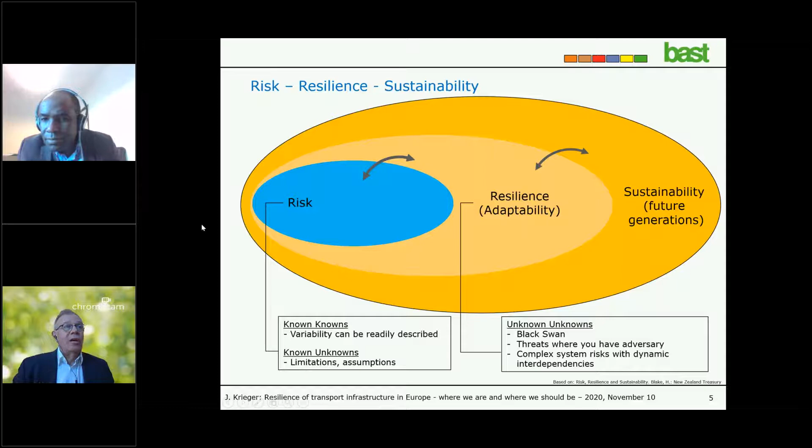So this is more or less the position of resilience within sustainability. I wanted to show. So what is resilience then?

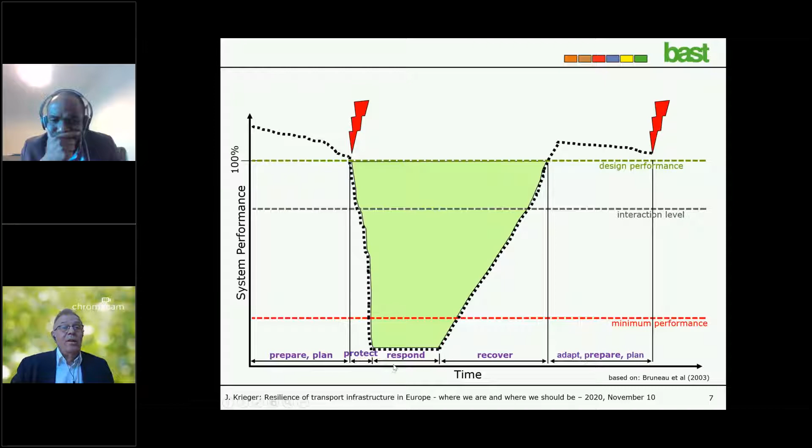So very often you see something like this, the system performance over time. You have an incident at a certain time shown here. And what is resilience? Resilience starts well before the event. You can prepare, you can plan, you can protect your structures or your assets, respond, recover, adapt, prepare, plan. This is why you very often see something like a resilience cycle.

So all of this is resilience, all these elements are elements of resilience. For quantification, very often you use these areas to quantify resilience, but I would not like to go into detail here.

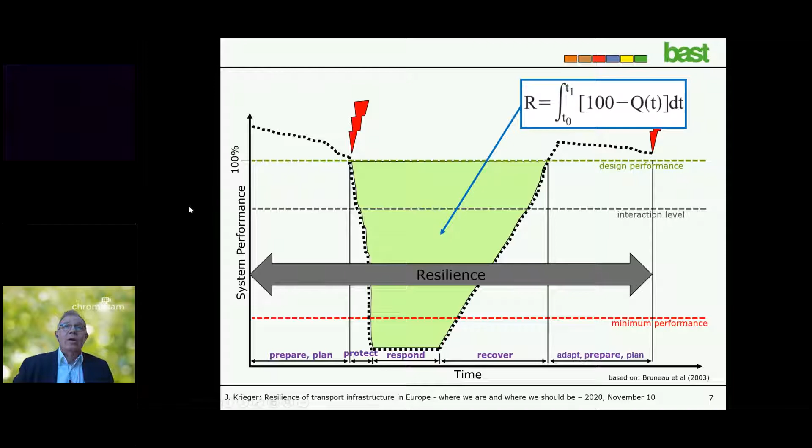Already mentioned before, what are the threats, what could be the events? This could be, first of all, natural hazards: earthquakes, landslides, storms, tsunamis. But also other hazards, man-made events, terrorist attacks, cyber attacks, more and more important I think also for our infrastructure as we move to smart roads and smart infrastructure. So it's important to know that resilience is, or should be, an all-hazard approach, not for one specific hazard.

So where we are with this topic of resilience: Adebola already mentioned that I have a function in PIARC, World Road Association. This is the strategic plan, and you can download this plan on the PIARC website. Resilience of road infrastructure is one of the cross-cutting issues within this strategic plan of PIARC for this cycle.

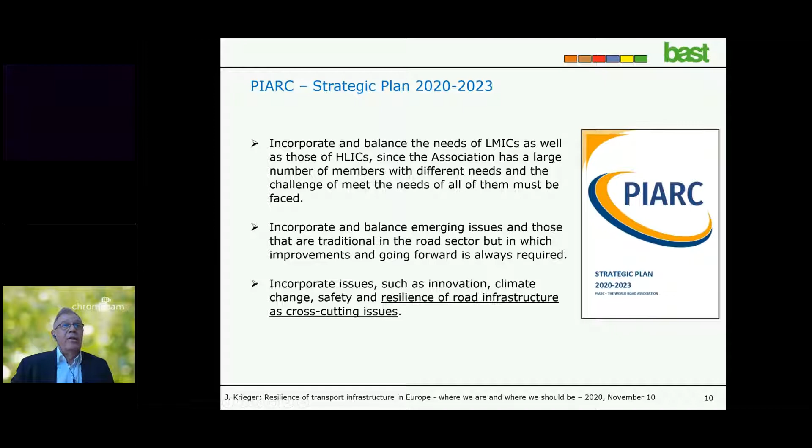So these are the technical committees. You know that PIARC is not a research organization, PIARC works more on case studies, on good practices, best practices. We have one strategic theme called Resilient Infrastructure, with pavements, bridges, earthworks, tunnels. And we have TC 1.4, Resilience of Road Networks. And of course we have a TC on asset management. All these technical committees have topics about resilience within their terms of reference for this cycle.

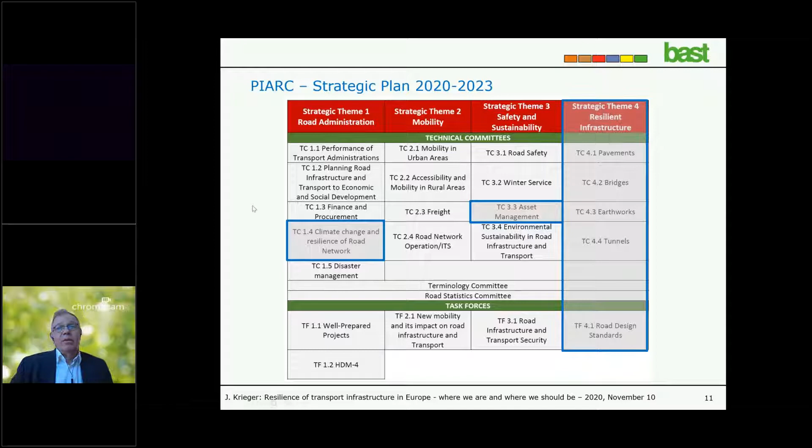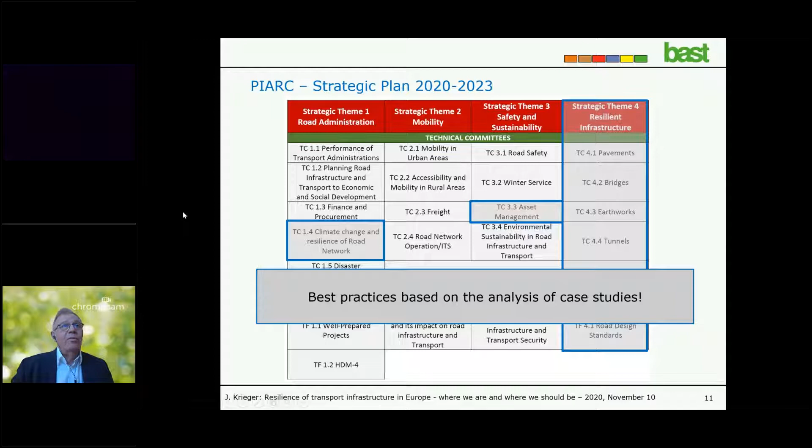So again, PIARC is not research. Therefore it's more where we are. PIARC collects best practices based on the analysis of case studies. So this is what PIARC does and what PIARC will do.

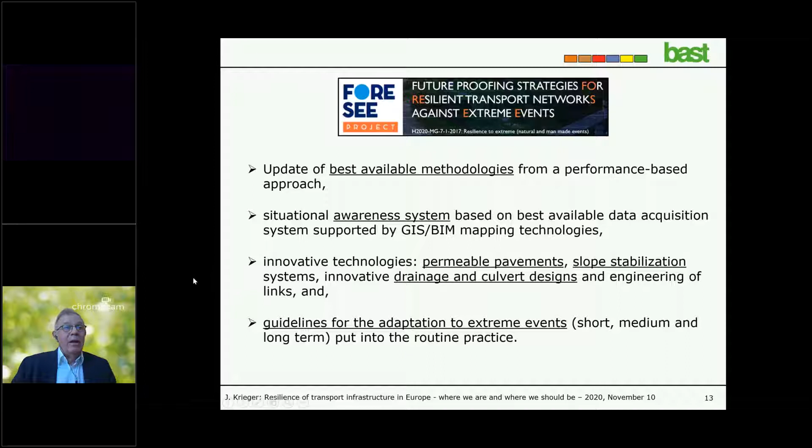A little bit different, of course, like mentioned, the project FORESEE. I have just copied and pasted something from the internet sites of these projects. FORESEE looks at methodologies, awareness, but also specific measures for specific elements of our infrastructure. What I love to see here, we will probably have guidelines at the end of the project, which makes the implementation much more simple.

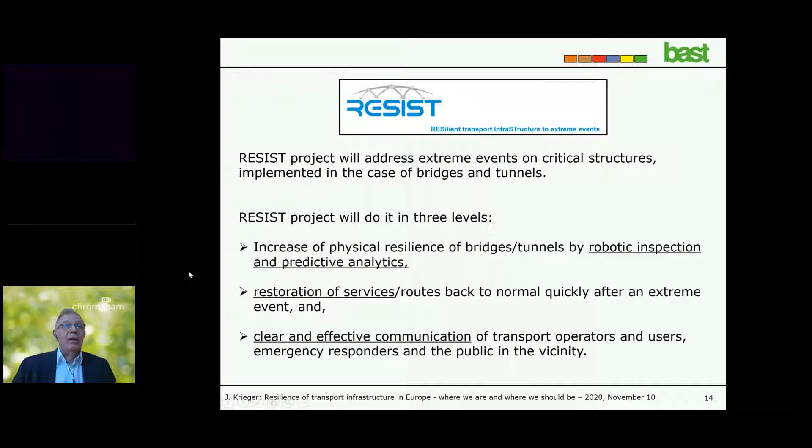So RESIST: robotic inspection, predictive analytics, restoration. This is more about coming back to normal operation, and communication, which is absolutely necessary in emergency situations.

SAFEWAY works on 3 elements here: preparation, response and recovery, and mitigation. So more or less most of the elements of resilience. And Panoptis looks at climate change scenarios and aims at developing integrated tools, which is important.

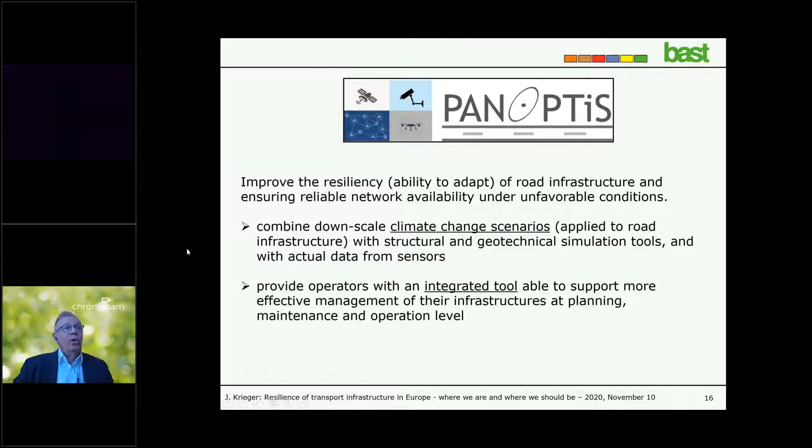So I think we can somehow answer this question. Looking at PIARC, we will collect good practices and analyze case studies, good examples. So this is important. We will see how owners and operators work with resilience. And of course, from these 4 projects, I expect a significant step forward. This needs, like already mentioned, the project results need implementation.

So this was the first part of my presentation. The other question: where should we be? And in my opinion, where should we go with resilience? This is also important.

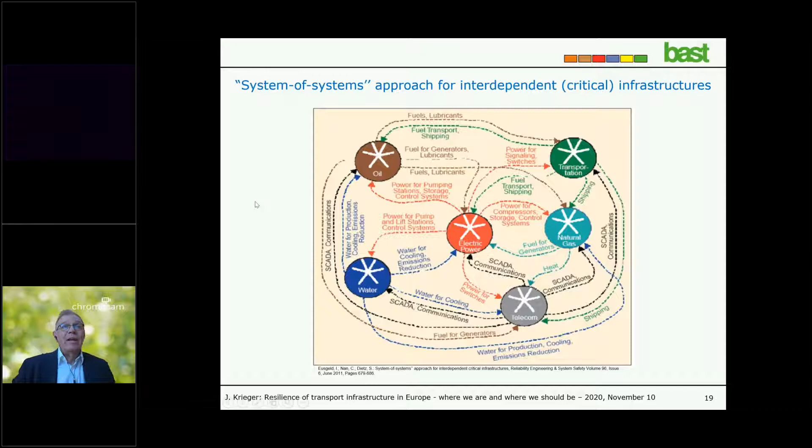So I think we should move from this specific resilience, which we are doing now, to a more general resilience, where we take into account that each subsystem interacts with others, and that we have top-down approaches and bottom-up approaches, and that these questions are really multidimensional. These are really complex analyses and complex models, but I think when we look at especially black swans or pandemics, we need this kind of approach in the future.

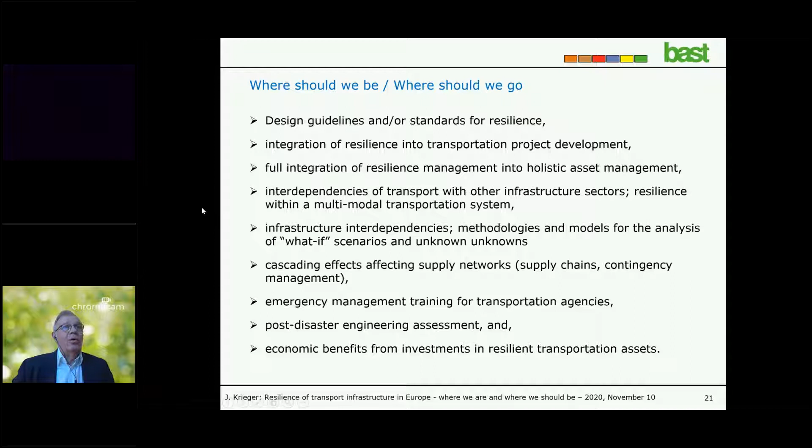Something which is done from time to time, but I think should be done more regularly, is post-disaster engineering, you could also call it forensic engineering. And maybe the most important part here: what are the economic benefits from investments in resilient transportation assets? These are just a few points that came to my mind when I thought about where should we go and where should we be. So this was my really short presentation, thank you very much for your attention.

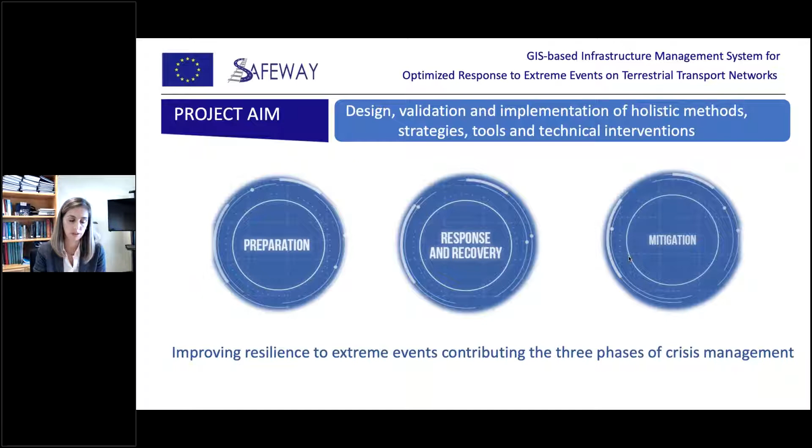For example, in the preparation stage, Safeway is developing methods to assess or identify the hotspots of our networks, sourced from external databases or open access maps and databases from other European projects, valorizing investments made by the European Commission in complementary projects. We are also using remote sensing as an essential technology for condition monitoring of infrastructure.

The aim of using these new sources of data is to feed new methods to quantify the consequences of events that may happen due to external hazards, and also to be prepared with alternative routes, or in some way to mitigate the impact of those external threats.

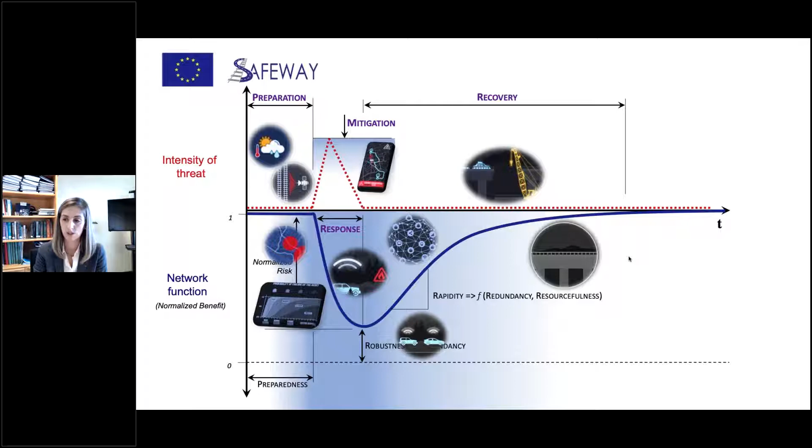Not less important, Safeway is also developing research relating to the long-term effect on resilience. Some partners of our consortium are working in the construction sector, developing new construction systems responding to adaptation needs due to external or natural hazards, but also including smart materials in infrastructures to have stronger assets.

The idea of Safeway is to combine all these new components and innovations through an IT platform whose main capabilities refer to the capacity to ingest new sources of data, integrate new methods for data analysis, and finally provide tools for decision making.

It's worth mentioning that one of the key components of the IT platform is an enhanced decision support system, supported by risk-based predictive models, whose final aim is to minimize that area of the curve we were looking at before.

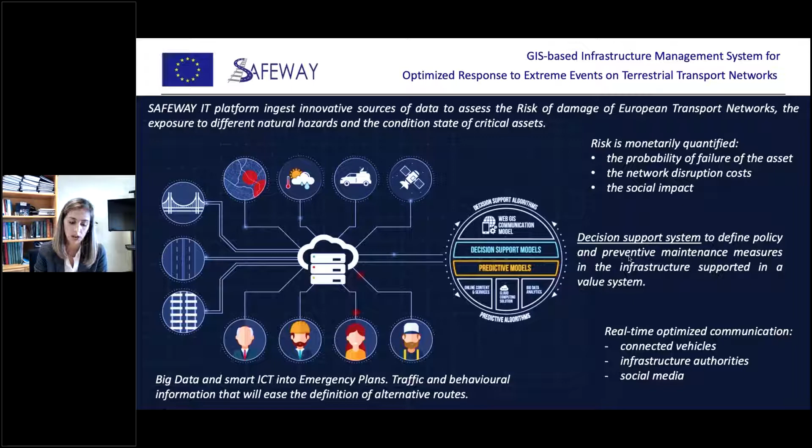Not less important, the platform is not only recruiting information for decision making, but also acts as a point of exchange of information with all agents involved in the use of the transportation network - managers and operators, but also end users like passengers or drivers - by providing real-time communication and recommendations on the optimal evacuation route.

Just to show you quickly some results already achieved in the project: one of the most relevant relates to the quantitative risk assessment of damage due to natural and human-made hazards. This is a framework that can also be applied at the European scale by developing maps or hotspots showing critical points of the network in the event of extreme hazard.

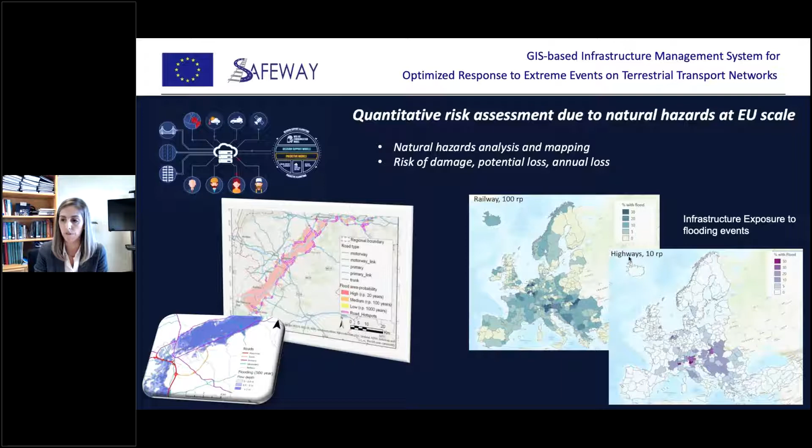Also, methodologies for assessing the exposure of our networks to different types of hazards have been developed based on GIS technology. As you can see in the slide, there are maps we can create to illustrate a prognosis on the vulnerability of European transport networks to future events.

The quantitative risk assessment approach is not only focused at a European scale, but also at an asset level. The methodologies being implemented also consider vulnerability analysis in terms of structural and functional vulnerability, as well as methodologies to quantify the impact at different levels in case of failure of these assets.

It's also worth mentioning that Safeway is developing research regarding improvement of prediction for the deterioration processes of our structures, and also the update of the reliability index due to these external agents.

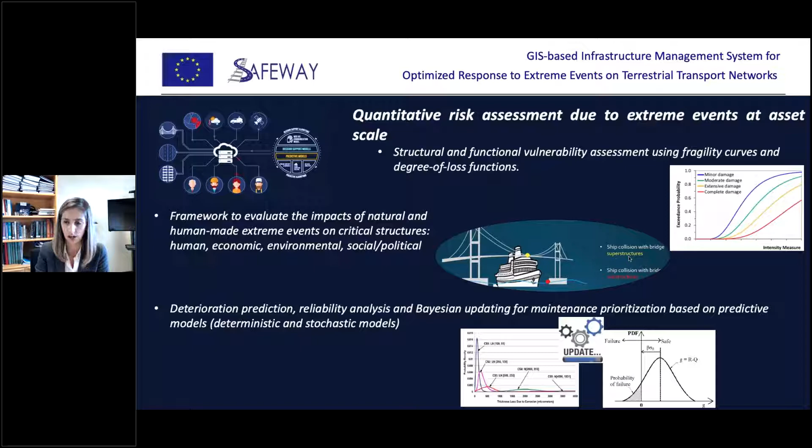This is connected to the monitoring of assets, or condition assessment of assets, using new monitoring technologies. Particularly, Safeway proposes a multi-scale infrastructure monitoring system based on satellite imagery to compute displacement using radar data of the assets and surroundings, complemented by terrestrial remote sensing technologies like LiDAR-based mobile mapping systems, which provide very accurate 3D models of the infrastructure, high accuracy in geometry, and automatic identification of damages or pathological conditions, which are used to create updated BIM models of infrastructures, in which Safeway is adopting the latest developments of open standards.

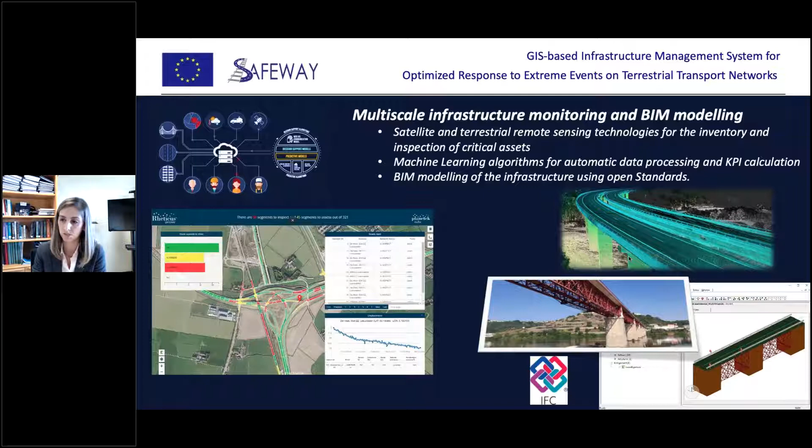Another source of monitoring is crowdsourcing. As I mentioned before, Safeway is recruiting information in real time from connected vehicles, but also exploiting social media data.

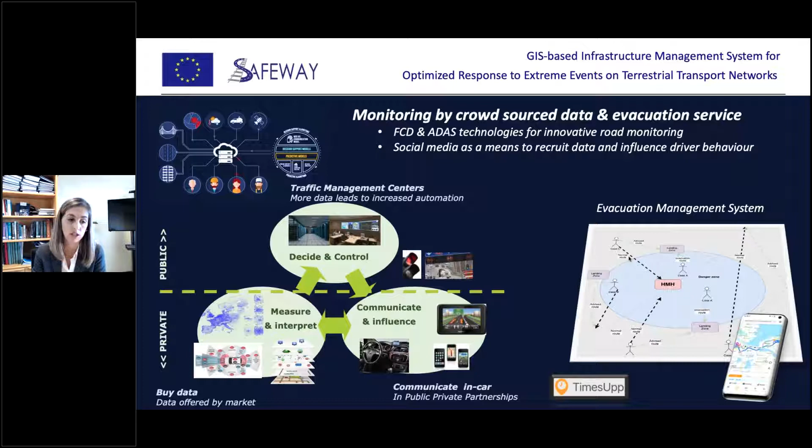At the same time, this new concept involves communication in both directions: recruiting information from users, but also being a channel to provide the most efficient or optimal evacuation route in case of a disruption in the transport network.

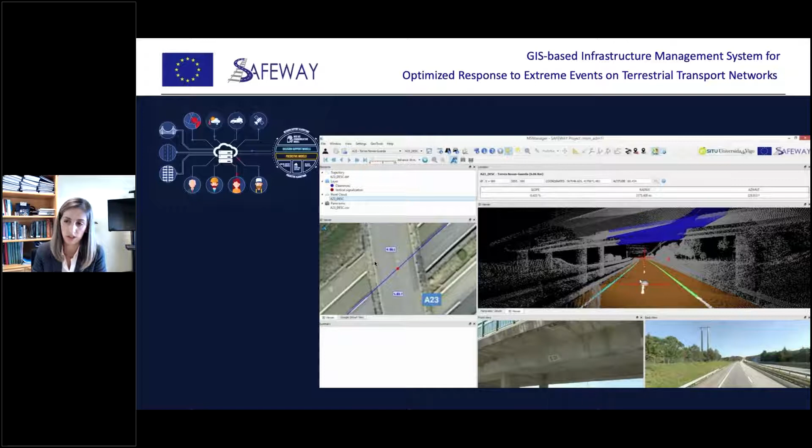In this regard, all those technologies are already being implemented in the alpha version of the Safeway IT platform. You can see here just a screenshot of the platform. But I would like to say that not only IT research is the focus of Safeway.

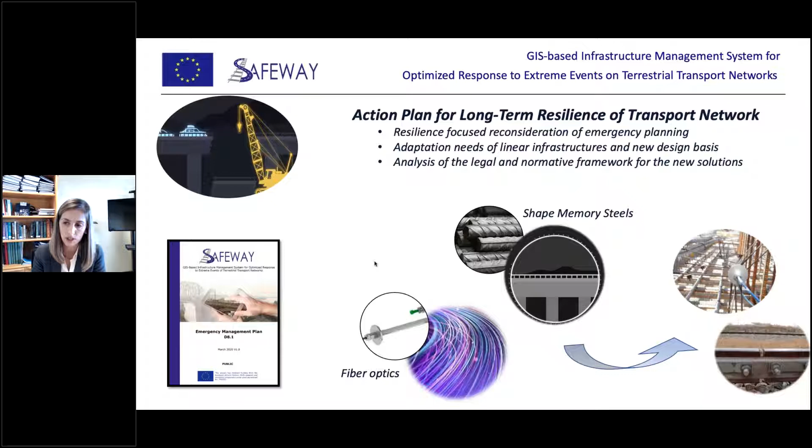Research is also being done in terms of actions on a long-term scale, by reconsidering emergency planning, including the new concepts and technologies already mentioned. On a different level, research is being done to provide stronger construction systems, including new sensors like fiber optics and new materials like shape memory steels.

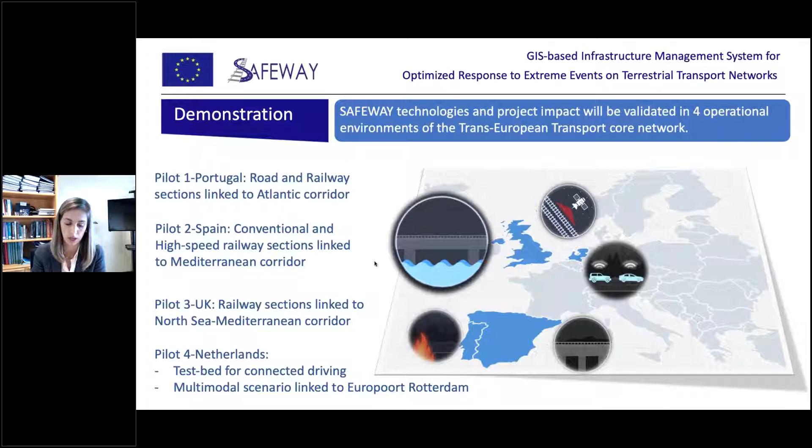Finally, I would like to finish by summarizing the 4 operational environments where Safeway is to be demonstrated, linked to the TEN-T core network, with pilots in 4 countries: Portugal, Spain, the UK, and the Netherlands, where different scenarios are evaluated. Most importantly, flooding events, as probably the greatest event affecting the whole of Europe, but also wildfires in Portugal, test beds for monitoring technologies in the UK, connected vehicle infrastructure in the Netherlands, and new construction systems in Spain. So with this slide, I finish my presentation.

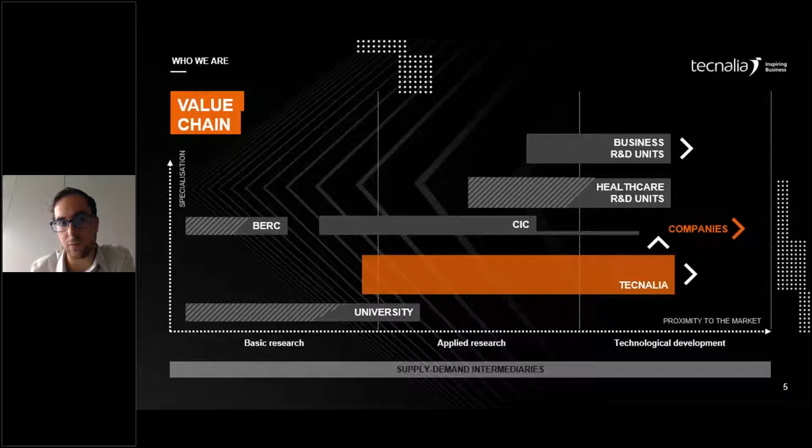It has been mentioned before by Rafael and Sergio that this was something we wanted to bring to the proposal when preparing the FORESEE project: to make infrastructure economically sustainable, giving them intelligence, optimizing performance, understanding useful life through highly technological solutions that make design easy. We believe we are doing this in the FORESEE project, and exchanging information with other projects here today shows we are working to achieve this.

Regarding the FORESEE project specifically, we are developing cost-effective and reliable tools to improve the resilience of transport infrastructures, aimed to control and reduce the magnitude and duration of disrupting events. We are developing new technologies and methodologies, working with resilience schemes and how to measure the improvement of the ability to anticipate, absorb, adapt, or recover from potential disruptive events.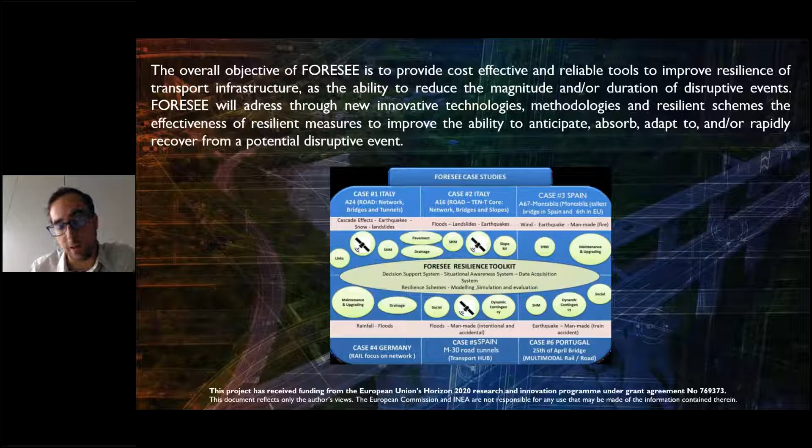We are going to validate them next year in 6 case studies: 2 in Italy, 2 in Spain, 1 in Germany, and another in Portugal, which I will explain later. Each one has different hazards, and we will validate different things in each one.

All these solutions, outputs, and tools will develop a harmonized resilience assessment methodology and will be integrated into a single toolkit. We are thinking about how to support infrastructure managers in the short, medium, and long term with a systemic perspective.

By updating available methodologies, developing new situational awareness systems using GIS, BIM, satellite technologies, new pavement technologies, slope stabilization systems, new drainages, or engineering links, but also developing new guidelines for adaptation to extreme events, defining new plans or adapting plans to include resilience concepts for design, construction, operation, and contingency plans, and collaborating with pre-standardization activities important for future construction projects to include resilience concepts from the very beginning, supporting the whole life cycle of the infrastructure.

The FORESEE project is formed by 18 partners in the consortium from all over Europe: Italy, Germany, Portugal, Spain, also UK. I want to show you a video that we checked this morning, though I'm afraid you won't hear the sound, but it summarizes quite well what we are doing in the FORESEE project.

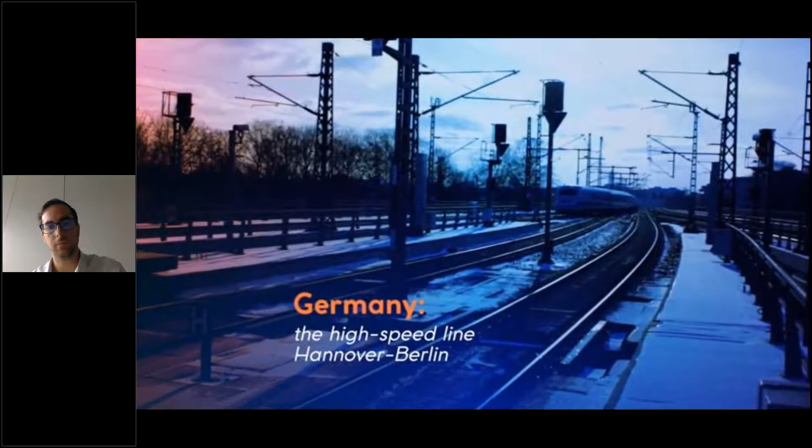Back here, I stopped the video.

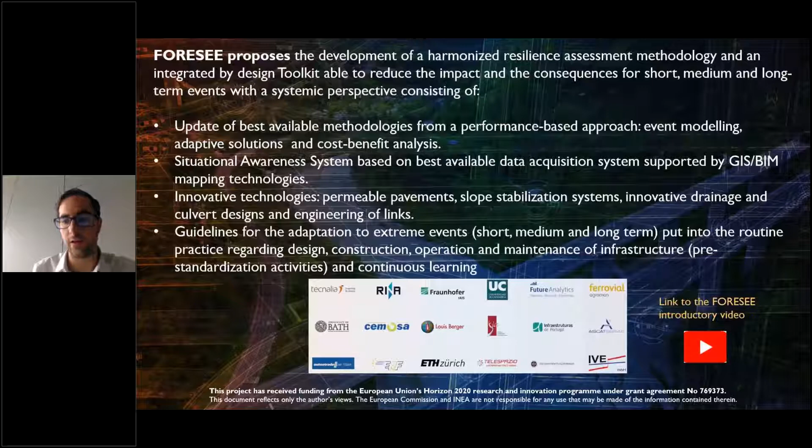Regarding the project, we are facing the last part now, thinking more about the integration of the different results and outputs, progressing in the development of the toolkit itself, on how to integrate all the different tools inside it, and also on how to validate those results in real case studies.

This is something we are planning to do in the second half of 2021. We are now planning how to match everything to be able to do that. But from here to the end of this year, 2020, almost all the results are almost finished, so they will be available, and we are going to work on integrating the different parts of the project.

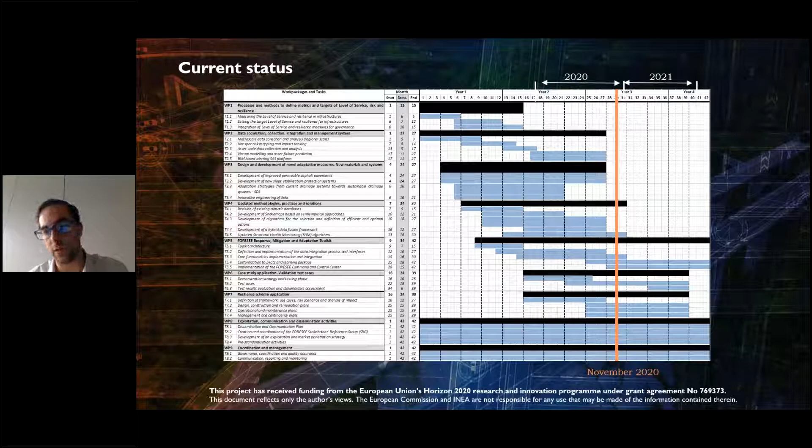Regarding the current status of the project, we have already developed guidelines to measure the resilience and service in infrastructures and to set target values. We have examples and a tool on how resilience consideration can be incorporated into infrastructure asset management practice, including hotspot mapping, impact ranking, and a stochastic flooding methodology to characterize them more efficiently.

Some of the outputs of the project are public and available on the website. I invite you to participate, and the links are included in these slides, and on our website you will find them very easily.

Very soon the project will produce results regarding a slope failure prediction tool to modelize the pore pressure within the soil and predict how the slope is going to fail. Another tool is a satellite tool for structural health monitoring and 3D visualization and BIM for visualizing failure points in a structure, plus new sustainable drainage systems on how to integrate them into a construction project and strategies to adapt different infrastructures.

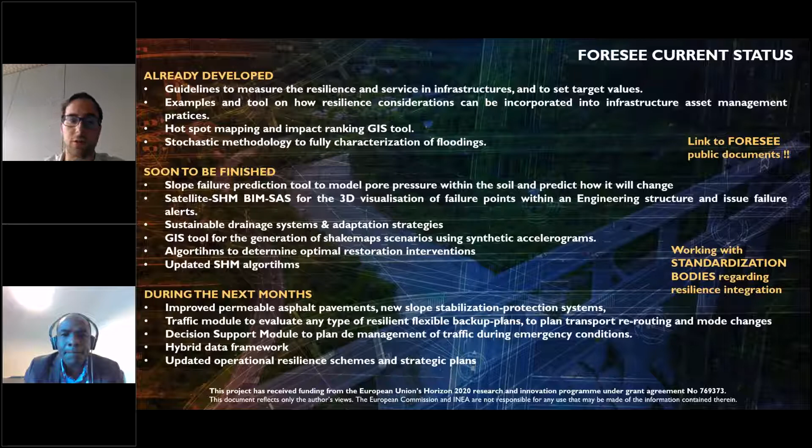During the next month, more results are coming regarding new permeable asphalts, new slope stabilization systems, a traffic module to evaluate resilient flexible backup plans on rerouting and mode change, and during emergency conditions, a decision support module to plan how to manage the situation.

We're developing a framework to aggregate data, new resilience schemes and strategic plans in design, construction, and operational and contingency plans. We are working closely with standardization bodies regarding resilience integration, as this is something missing or not well included in the different standards used by the sector, so we are developing and working with them.

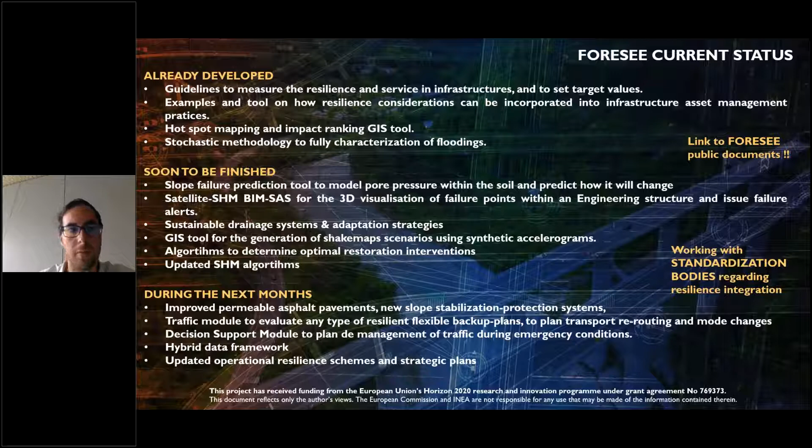I don't want to conclude without mentioning that inside the project we have organized a stakeholder reference group with more than 130 people from almost 60 organizations and 14 countries, chaired by Jesus Rodriguez, who is well known in standardization bodies. We try to organize different workshops regarding the results - webinars, roundtables, and document reviews - depending on the availability of the experts participating there.

We are looking to increase the presence of more people, more experts from different sectors and organizations, and we're planning more interactions. So if you are interested in resilience and this kind of activity, please just contact us - that's all from my side. This is our social media and the contact details you can use to reach the project and our partners, and we will be happy to answer any questions about this.

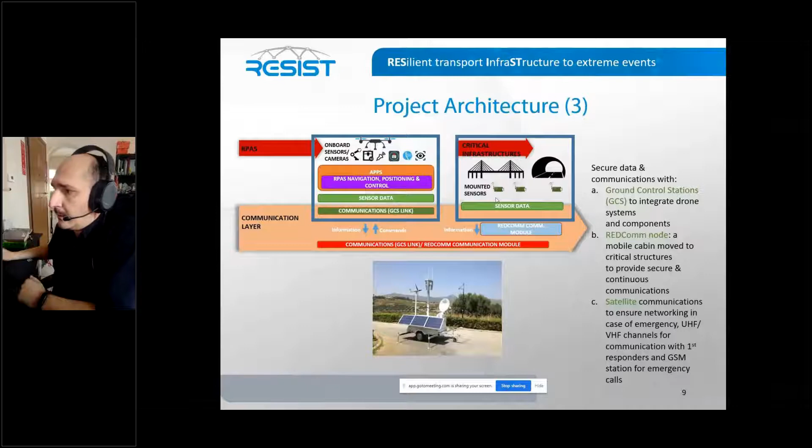We're going to have situation awareness decision using data collected from sensors and images, extended vulnerability assessment models based on civil, mechanical, material engineering models, and psychological and behavioral factors. We are developing a system for emotion detection that will be able to give personalized information to users of the highway depending on their psychological and behavioral state.

Strategies for mobility continuity, which are going to be multimodal and will take into account cost as well, and strategies for risk assessment and management. Of course, we're going to cover the whole system with a cross-layer cybersecurity system that will cover not only the network part of the system, but the field devices, including the drones as well.

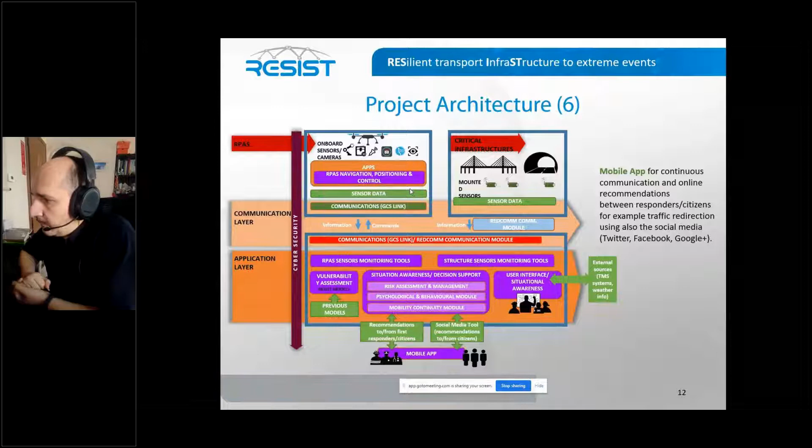The RESIST platform can in real time be aware of the situation and recommend actions to avoid and minimize the impact, as well as propose measures to increase resilience in the future through the risk management and assessment module. Finally, we are developing a mobile app which is going to be used to disseminate information about an event to the users of the highway, and also to disseminate information from social media.

Now I'm going to talk about our risk assessment and management module. The objective of this module was to develop a methodology and a software tool for risk assessment and management of critical land transport structures under extreme events, in order to optimize the selection of preventive and reactive adaptation measures.

In general, the system collects information from all the other modules, including measurements, mobility continuity, and traffic control, and makes an analysis of the event in order to notify the end user, the manager of the infrastructure, on what the current state is and what the future state of the structure is going to be.

We implement the above in the case of a highway, bridges, and tunnels, which we consider to be the most critical infrastructure on a highway, and we're going to demonstrate the above in three case studies that I'm going to mention later.

This is the RESIST risk assessment methodology. It integrates the models of hazards, damage, and consequence in a unified analysis procedure. In its final form, the entire procedure is based on a sequence of four models: the hazard model, the physical vulnerability model, the damage and functionality model, and the environmental and socioeconomic model.

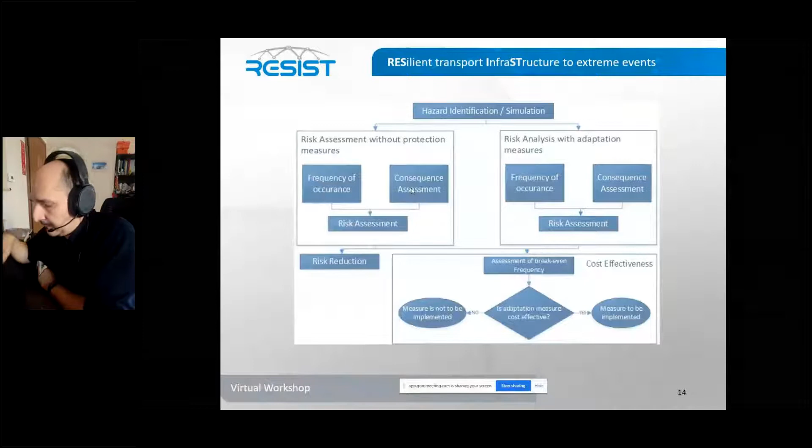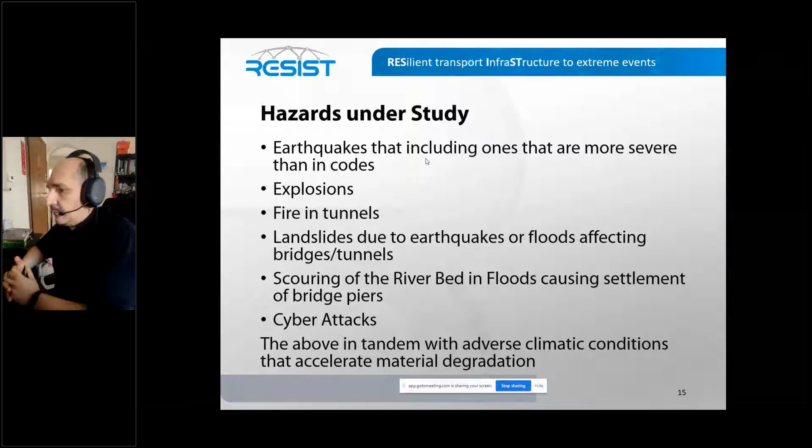The hazards under study are earthquakes, including ones more severe than in codes, so we can assume there is serious damage to the structure; explosions; fires in tunnels; landslides due to earthquakes or floods, structurally affecting bridges and tunnels; scouring of the riverbed in floods causing settlement of bridge piers; and of course cyber attacks. The above in tandem with adverse climatic conditions that accelerate material degradation.

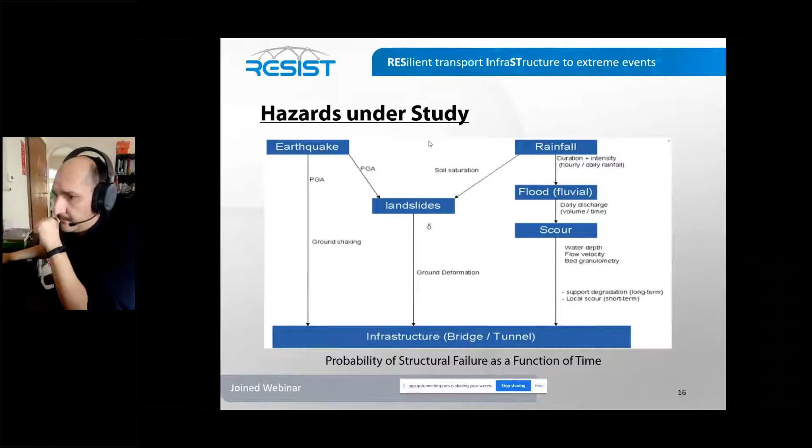Alternatively, extremely sophisticated attacks can only be accomplished by a handful of entities and can be considered to have a low probabilistic occurrence. So in our case, we assume there was such a case. The social, economic, and environmental consequences involve a hazard that affected the highway and caused damage. We consider that we had loss of life or injuries, environmental loss, and economic loss, and we're checking for direct and indirect effects.

I will continue with some of our other innovations, and I'll be quick. Aerial robots for the inspection and mounting of sensors, ultrasonic sensors suitable for the RPAS, a computer vision system suitable for the RPAS, and a secure and resilient communication system.

A cross-layer cybersecurity platform that is already developed and under test, mobility continuity for passengers, which is also developed and under testing, and the risk assessment management system, our last developed module, which is now already tested in two scenarios for the Egnatia T9 bridge.

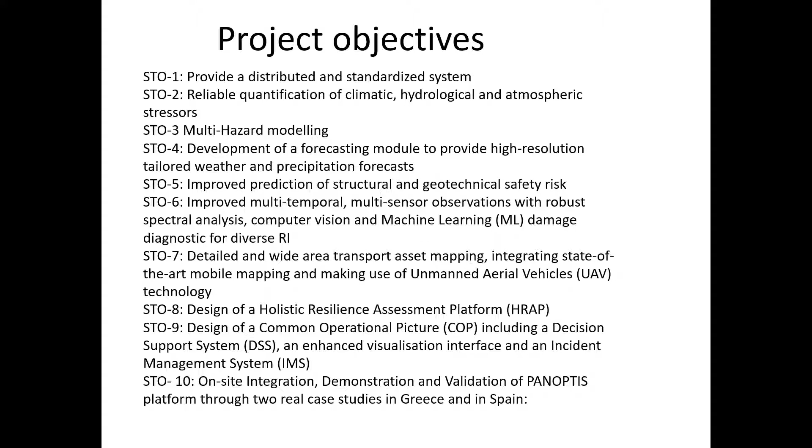So we have a lot of components in the system. I won't describe all of it, but we are starting from TRL 3 or 4, and we want to reach TRL 6 or 7, since this is a research innovation action.

Basically we have 3 dimensions in this project. We've conceived it as a holistic approach to a system that could be purchased by end users. The center of the system is the information management system, command and control capabilities, and the assessment and decision support system. This is designed to be implemented in local, regional, or national centers, giving clear visibility to the infrastructure manager of what's happening.

This picture can be distributed to other end users with right to know or right to intervene. We also give other end users the capability to add reports and information to the system. The system can be adapted to different organizations, so it can be quite centralized for some end users or very local for others. Of our two end users, one has local management and central management in Spain, but in Greece it's very local.

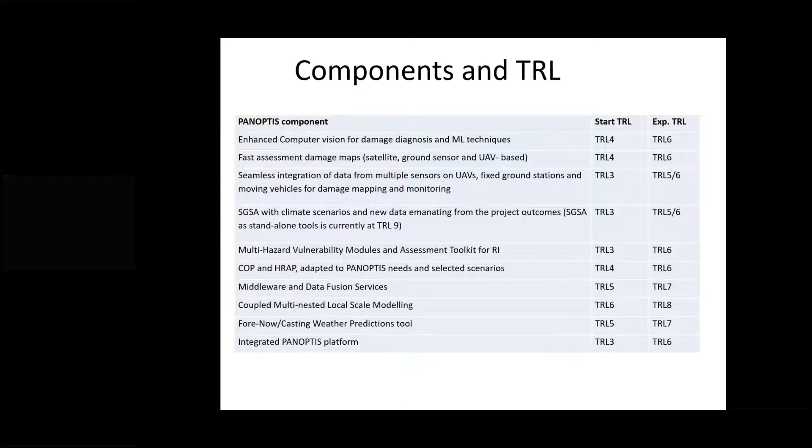So we've built this system as an industrial product. The main parts, the information system and all the sensors, are under the responsibility of the monitoring agency. But other parts might not be fully integrated into the system, like prediction and vulnerabilities. It's not the job of the road infrastructure manager to predict natural risk, so it's included as a service accessible and adapted for the system.

Same for vulnerability. What's important in Panoptis is that the system is highly flexible, so it can be used in day-to-day monitoring, where there's no satellite or UAV most of the time. We can gather all information through local sensors and meteorological stations. The other way of using it is for inspection, meaning on a routine basis we can prepare inspection of elements.

The third way we use the system is reaction to an event. In this case, we use mobile sensors and reinforce the system with capabilities for a fast assessment of the situation and to react on the circulation plan.

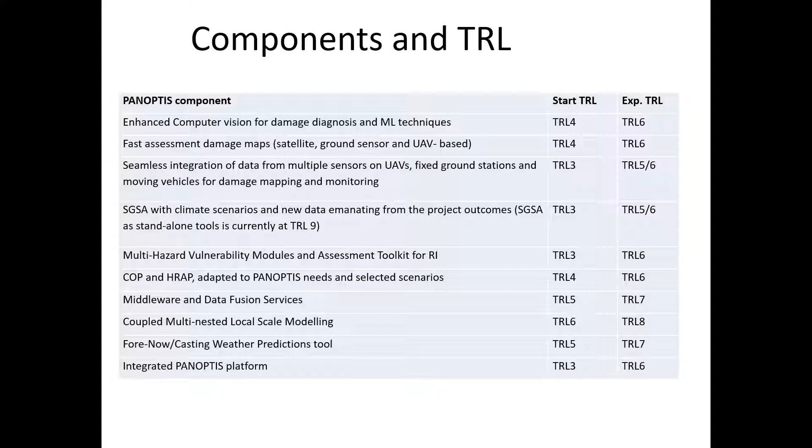So the pillars of the project are very detailed modeling about the hazards, real-time or near real-time assessment of the structural health, and geotechnical and structure simulation tools, so we can play with the vulnerability of the elements, a toolkit for the geostructure.

Computer vision techniques, but we will avoid redoing what has been done in our previous project on bridge and tunnel assessment. We can adapt computer vision to what we want to detect, but Panoptis will mainly focus on large events, not the detection of cracks or micro events.

With this, we can do a quick assessment of the situation - the forecasting of the weather impact. We have microclimate capabilities, meaning we have a detailed situation and prediction for every spot, and the resilience assessment platform we developed using deep learning technology, taking into account the experience from the end user. All this finishes with a display of some kind of common operational picture that can be distributed to all the end users.

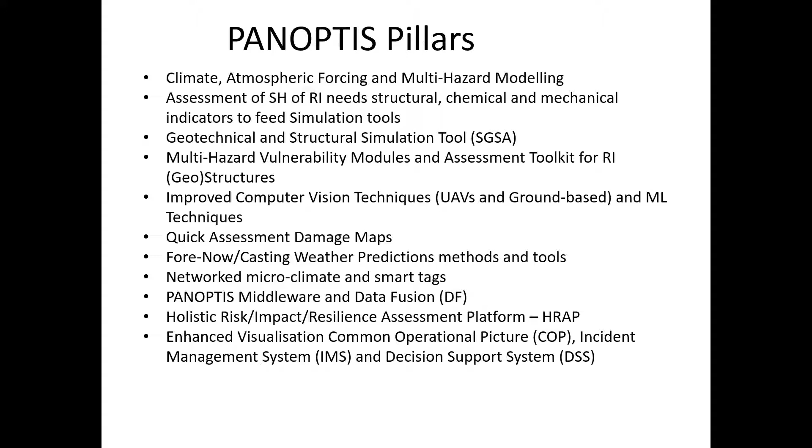So the ambition is the effective management of the road in case of natural or man-made disaster, but also providing a day-to-day system to manage and monitor the infrastructure. We have a lot of modeling tools and simulators to predict what could happen, and tools dedicated to situation awareness and operation. We include the capability for remote sensing through unmanned platforms like UAVs and satellites, in order to limit or avoid having to send people with cars and so on. So I think I will stop this because I'm already too long.

So if there are any questions about Panoptis, I can answer. Thank you very much, Philipp.

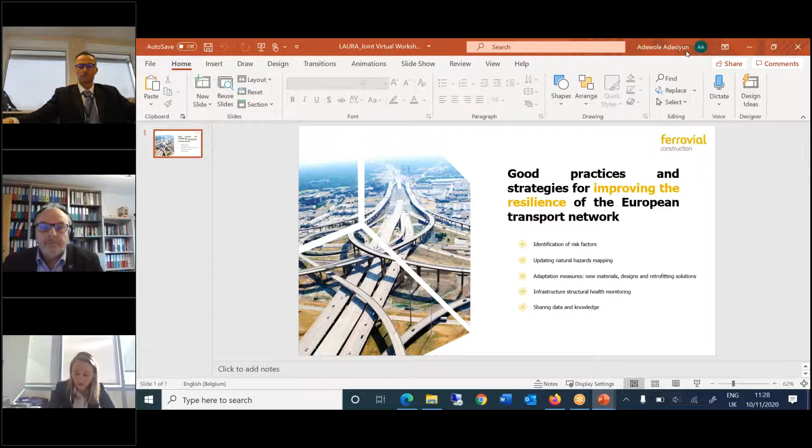My name is Laura Tordera. I am the Global Head of Innovation in Ferrovial Construction. Ferrovial is a Spanish multinational company involved in the design, construction, financing, operation and maintenance of transport infrastructure and urban services. We are here because we want to talk about resilience. Resilience is a critical factor for us as a group, and more particularly in Ferrovial Construction, the construction branch of the group. Due to the relevance resilience has for us, we are actually involved in two of the calls projects, FORESEE and SAFEWAY, presented previously by Iñaki and Belén.

The good practices and strategies that drive the improvement of the resilience of the European transport network are: first, identification and understanding of risk factors, because risks need to be identified and understood over the full lifespan of the infrastructure. It's necessary to identify them and have a deep understanding of the likely frequency and magnitude of risk, and how they are likely to change in the future. It's important to try to understand what the possible future changes might be. This requires an understanding of climate and disaster risk and an understanding of current weather patterns.

So, my name is Federico Di Gennaro, Head of Strategic Projects of AISCAT Servizi, the consulting engineering company of AISCAT, the Italian Association of Toll Motorways. If you can go to the next, please. I will go directly to the point. Next, please. Let's go to the content. Next, please. And the next one.

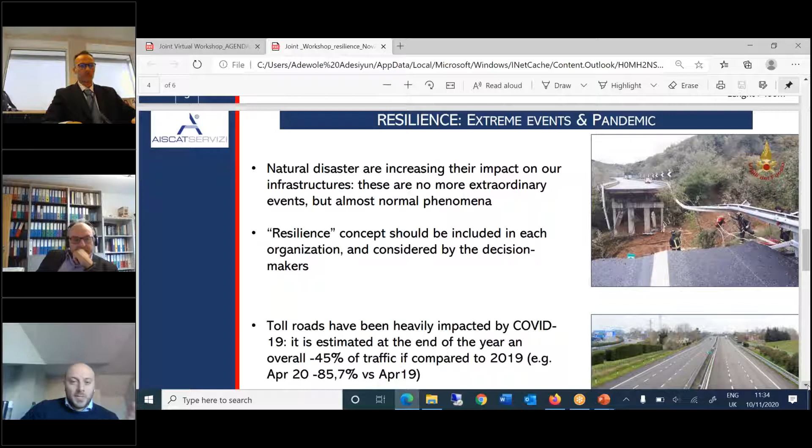But also, we should consider not only climate-related events, because as we saw, the pandemic dramatically affected our business. To give you some numbers, consider that on the AISCAT toll roads, we had a minus 85% of light vehicles traffic if compared to the previous year, April this year versus April of the previous year. The pandemic had and will have a huge impact on the revenues and consequently on the financial capacity to improve the maintenance. On that respect, considering climate and pandemic effects, we are also working to improve our emergency management plan, including the so-called black swan scenarios.

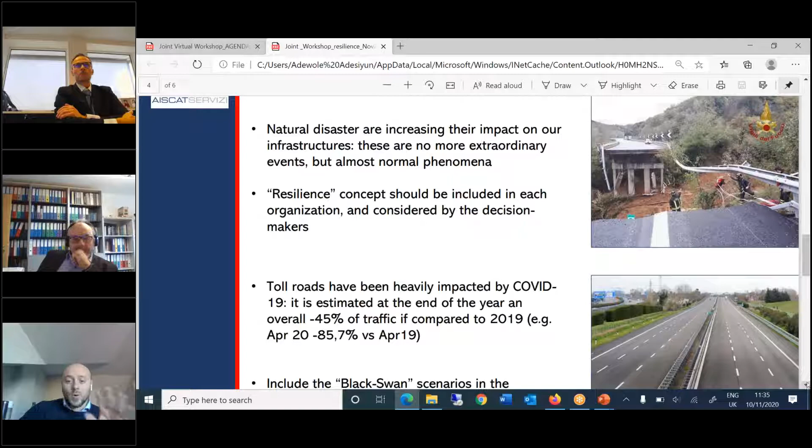Next, please. What are the main challenges in our opinion? There are several types of tasks that we can afford. We are improving our technological and organizational response by adding new tools to the operation and maintenance phases, but we also have to consider other factors that are outside our domain. The first one is the time misalignment, because the political cycle are not in line with the long payback period of adopting resilience measures. Another important point is to involve and engage all the different types of stakeholders, not only road operator, of course, or engineering firm.

Another topic is related to the calculation of externalities of adopting resilience measures. We have to extend the potential benefits not only to physical assets, but also to the communities and to any kind of subject or entities that can receive a direct or indirect benefit from the adoption of resilience intervention. The last point, in our view, the most important one, is related to funding, because we should look for new instruments to overcome the difficulties of raising low-cost capital. And there are a lot of new financial instruments to fund resilience infrastructure interventions that can be used. And I will be glad to give you more information by email or later on during the panel discussion. Thanks.

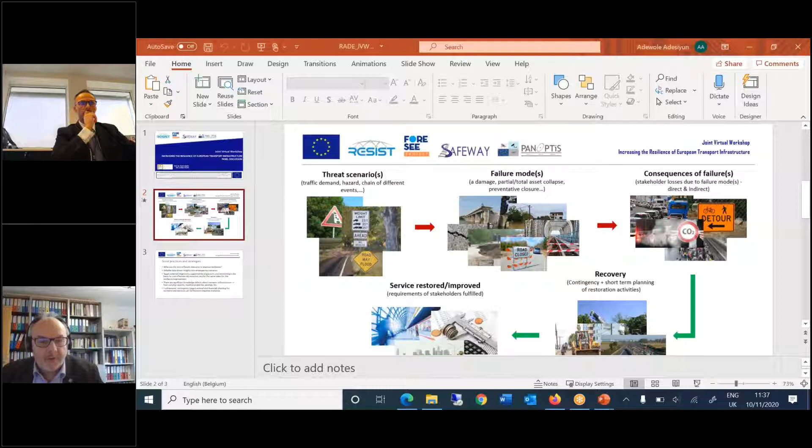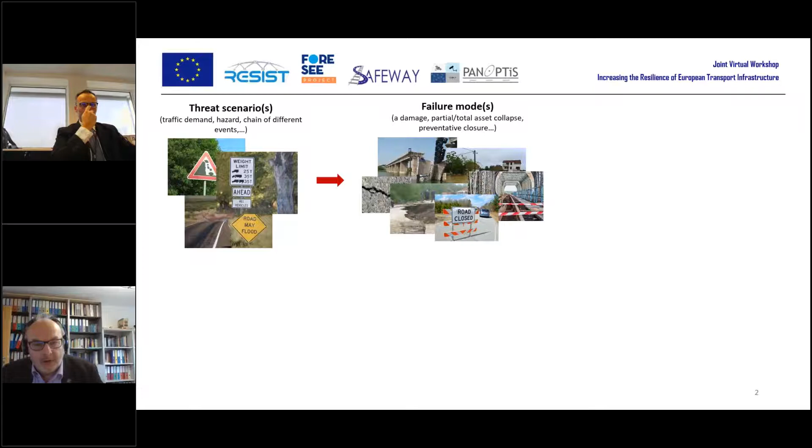So how to minimize the impact of both natural and extreme events on seamless infrastructure operation. The question is where to attack, because the problem of minimizing impact to resilience can be tackled in different ways. One possibility is to try to reduce the threat itself. If that's not possible, maybe we should increase the resistance of our infrastructure to prevent that. Or if that's not possible, you can click again.

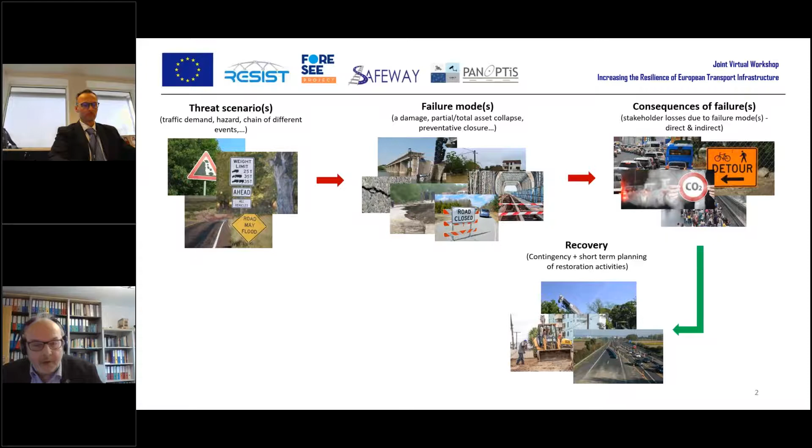Maybe we could go and reduce the consequences. And if that's not possible, then we go to recovery, having contingency planning, short-term planning, restoration activities, until finally, next click please, we can have restored service. Now this is not a trivial task to figure out where to attack, because things have different costs entangled to the different measures you can put on these different levels.

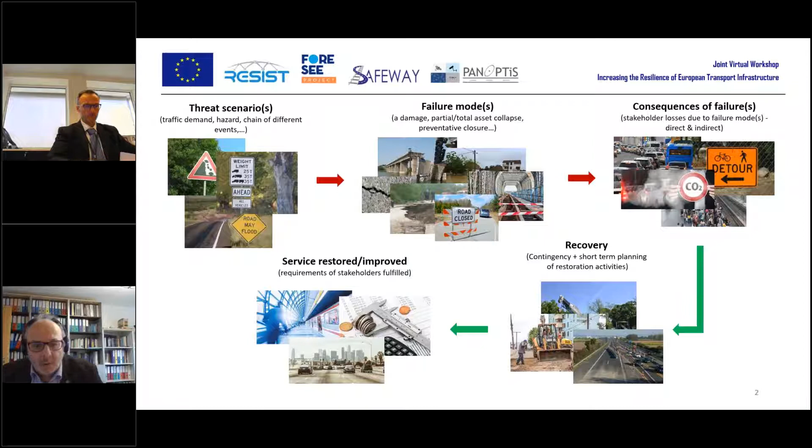This means we have to know really what is going on in infrastructure. Currently we have a lot of data which are not structured and not used well. We have designed all this infrastructure, we have a lot of paper data, some stored in archives, and we are not using that properly. So apart from target-oriented diagnostics supported by inspection and monitoring, we need to use this existing knowledge about load carrying capacity, material property, geology, etc.

So these two things together, the clear insight into our infrastructure together with diagnostics and monitoring, can move us further with regard to minimizing the impact on resilience. There are sophisticated methods, but also less sophisticated things we are not using as we should. And of course contingency measures, both organizational and financial, for planning recovery interventions can improve resilience. When I talk about financial, I'm also talking about insuring and reinsuring some of these hazards. We saw this especially in Switzerland with the pandemic, that helped quite a bit, and this can also be used in infrastructure.

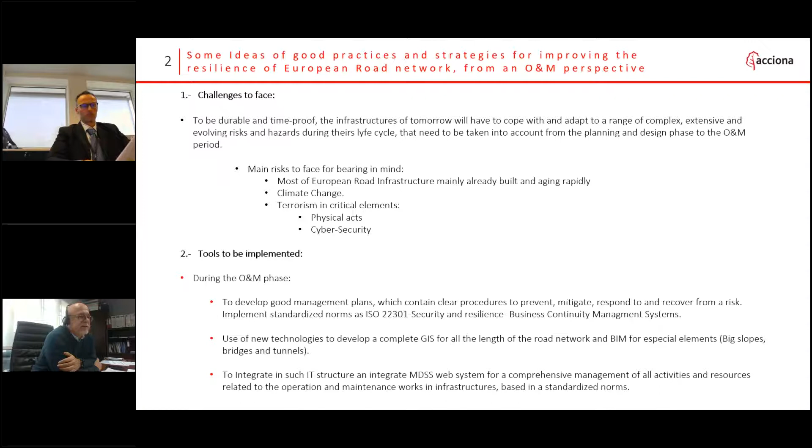So what's our aim? Our aim is the digitalization of all the road O&M services to operate them in a more effective way, because in a context of budget reduction that we all suffer from political nature, we need to use our tools and our research in the best way in order to be able to manage them very efficiently. What do we want to get?

We want the users, the ones that have to suffer all these disruptions in the services, to not have them. So by managing all those tools, we will be able to deliver the best service.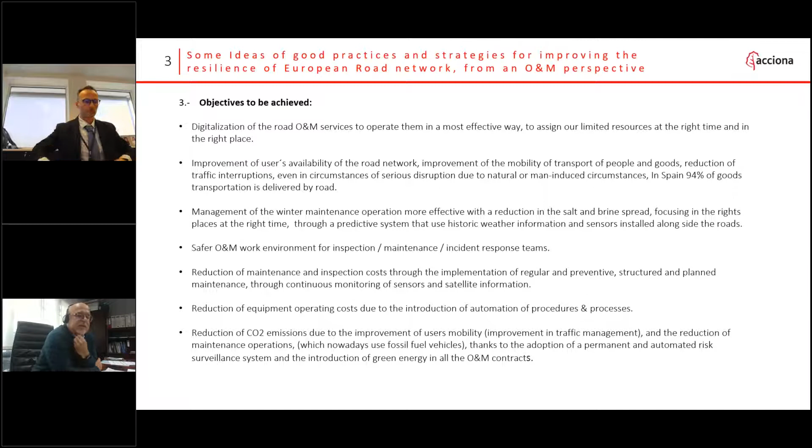From our point of view, after working closely with Panoptis, using weather stations, weather information, even mobile weather stations, and other types of sensors, we are starting to see the benefit. Despite Spain having terrible problems in winter with snow management, the winter maintenance operation, we want to try to reduce the salt and brine spread. By using this technology, we will be able to reduce it.

Another very important thing for us is reducing the work environment risk, improving safety, and reducing costs through those tools in maintenance, and reducing the cost of operating the equipment we already have. So far, from what we are developing, we are just obtaining the first benefits of those tools. We expect that in the future we will be able to run our O&M business in a much more efficient way.

So that's all I want to say. If you have any questions afterward, I can come back.

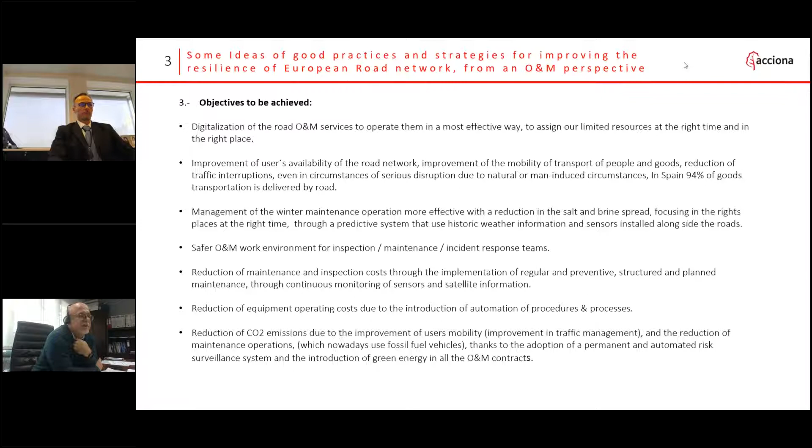Thank you very much, Vicente. Thank you all for bringing this very important statement, which definitely complements very well the input we had in the first part of the workshop.

Well, I would like to continue for the last 15 minutes on some specific issues. Maybe first, Laura, I would like to ask you the following. We heard quite a lot this morning about resilience, very much turned toward infrastructure. But as everybody knows, resilience is not just about infrastructure. It's also about individuals, communities, and institutions. From your point of view as a construction company, how do you see this? Especially in light of the COVID pandemic that we have all faced, are there any lessons learned for infrastructure that we can collect from different countries where it's been relatively successfully dealt with? Could you please enlighten us on that? What's your view on it?

Okay, yes, can you hear me? Yes, we can. Okay, thank you so much.

Yes, this is really important, the concept of community. Transport systems are a fundamental part of our communities, our modern social and economic infrastructure. Transport systems enable the free movement of people, goods and services within and among European countries, enabling the generation of economic wealth. Unfortunately, this freedom is now temporarily limited because of the COVID pandemic. Although we are going through very difficult times, there are some lessons we can learn from pandemic management. For example, we have the case of South Korea, which is now a success story. South Korea became the first country to surpass China in the number of newly infected people with coronavirus at the end of February. The epidemic reached an alarming peak at the end of February, with almost 1,000 cases reported in a single day.